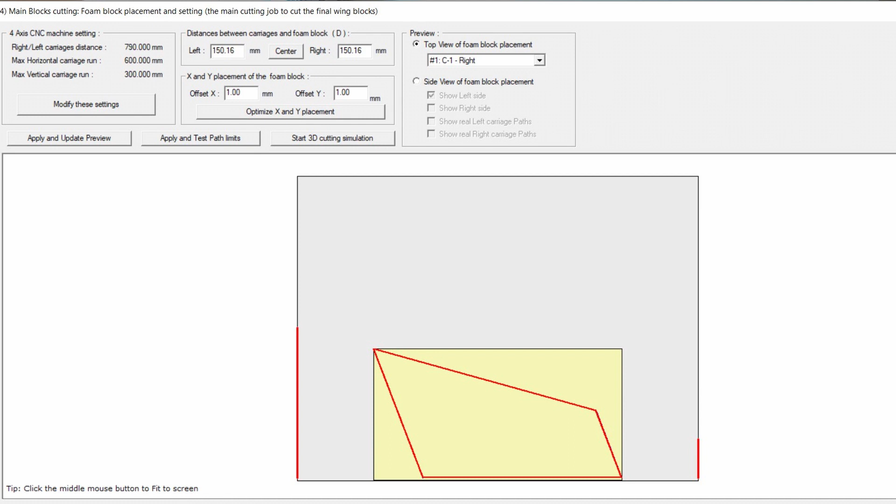And the reason for doing that is two reasons. One, it saves a lot on foam. But if you've got a really swept back wing, you might not have enough travel on your foam cutter to actually get the wing out. By using this option, we can get highly swept back wings, and it also saves a lot of foam. I've managed to get a whole set of wings out of one piece of foam. And then at the final part, I'll put all the parts together and show you what we've got.

So without further ado, let's get started.

So before we start the foam cutting, what we need to do is get the foam cutter set up. I get a few questions on the website and on YouTube about certain aspects of it, so I thought I'd cover some of them with you. It will probably make things a little bit easier, because if you're first starting out in this, it can be a little bit daunting sometimes.

So let's go over a few of the things. In part 2, we created the G code. In the setup, we told the system how much travel we've got on our machine - we gave it distances for the horizontal and the vertical, and the distance of the carriages.

These two are quite easy to work out. All you need to do is, in the control software you're using - at the moment I'm using CNC Foam for this, but it works on any of the other software - just run the system until it comes to the end of its travel as far as it can go, and then note down the figures. So within this here, I've got about 600 on the horizontal and about 300 on the vertical.

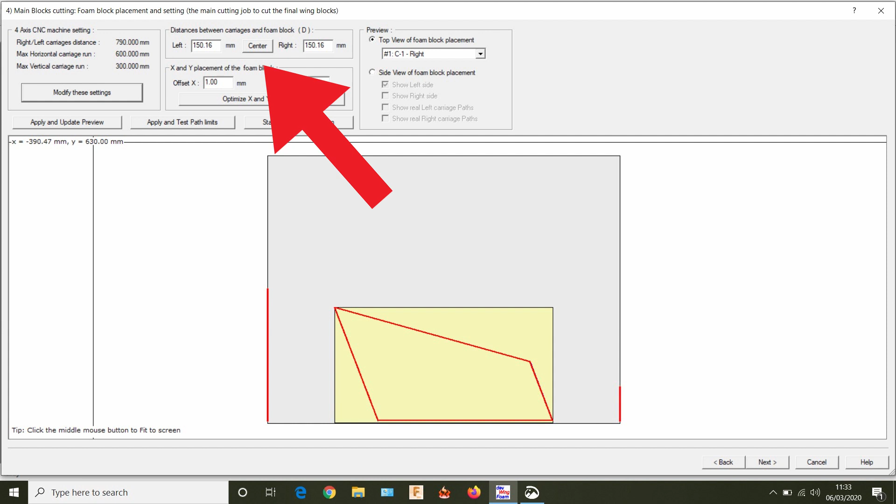What I do then is find the midpoint, because in DevWing Foam all the placement of the foam is done via the centre. You can do it one way or the other, but I tend to like to work to the centre. I put the foam on and then measure from this edge, which is a little bit tricky. I use a square and a tape measure and mark on the foam the exact centre point of the foam.

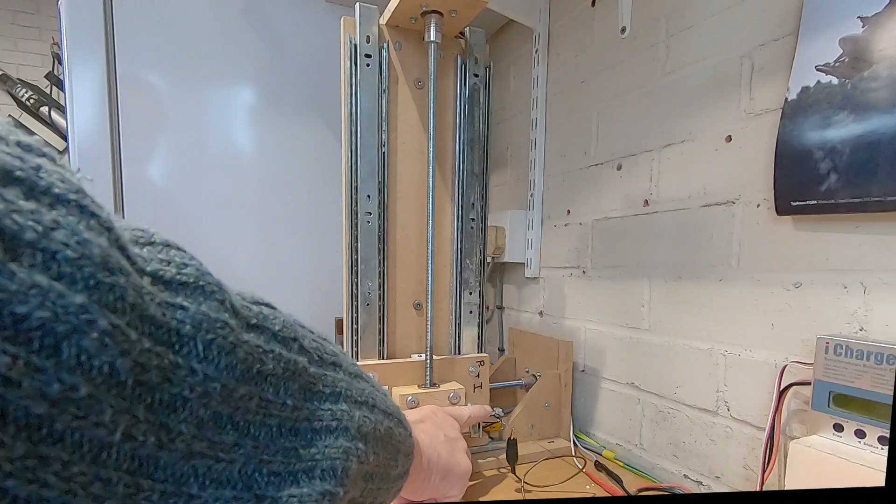The other thing I get questions on quite a lot is tension in the spring. So what I've done is I've actually taken the spring off of here. When I had it out in the shed, I had a lot more distance, so I could actually put the spring down here, but because I'm a little bit restricted in width in here, what I've actually done is moved the spring up to there, and it's attached to the wire.

There's a little joining piece there, and this is very strong fishing wire, I think about 60 pound or so. So what happens now, as I pull on the wire, it just tensions the spring. It means if I had the spring down here, I would be losing quite a lot of width there, and it would restrict the length of the spring.

Sometimes when you're doing these tapered wings, you do get a lot of movement on it, so that seems to work quite well there. I've anchored the fishing line to the bolts here that are holding this piece to the frame, and that seems to work quite well.

Another thing that comes up quite a lot is how to power the wire. There's a couple of ways you can do it. On the ramps board that we're using here, so this works on CNC foam and also the one that's on the website, 4-axis Grbl port.

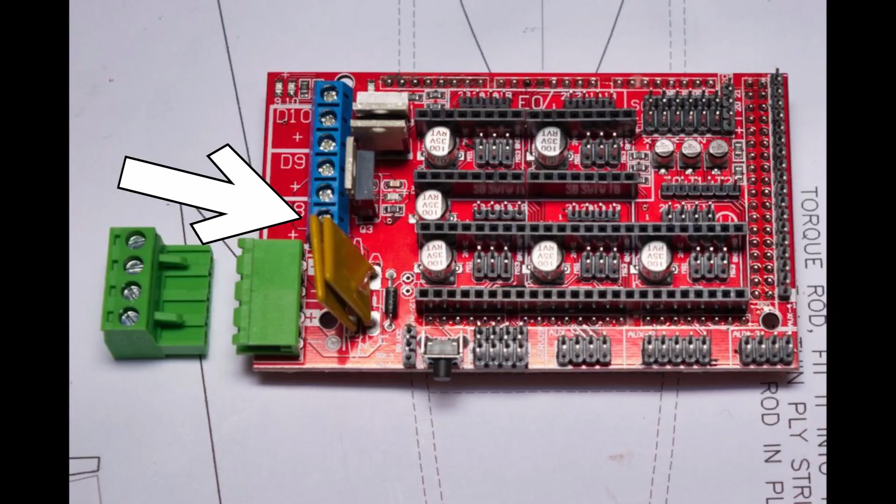You use what would normally power the heated bed, and it uses a PWM signal, pulse width modulation I think. I have used it, and it does work, but what I've found is it's not very consistent. On smaller pieces, it seems to be fine.

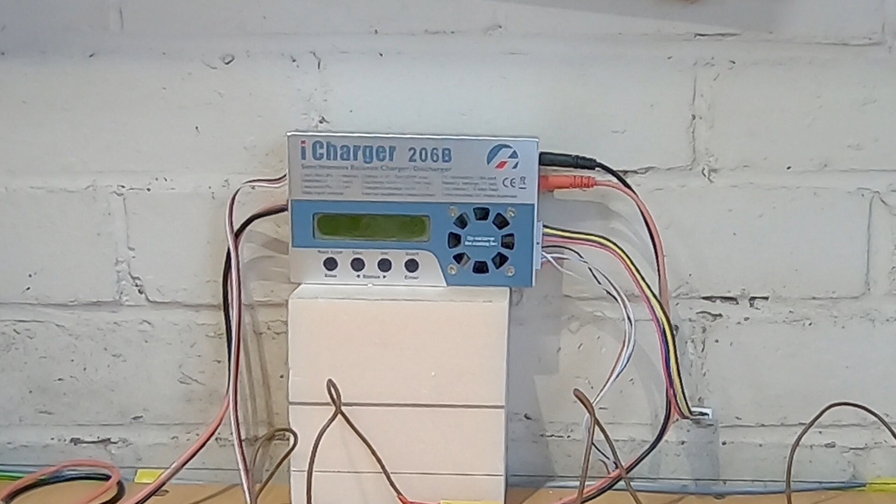So what I've used, and I've used since the beginning, is my iCharger. Now you don't necessarily have to use an iCharger, most LiPo battery chargers will work. What you can do is set them on a NiCad setting and roughly start around about 2 amps, see how that works.

Now on the iCharger, it has got a special foam cut option, so I'll just switch it on. I think really all it is, is probably very similar to the NiCad option. So I've got that set for 2.3 amps.

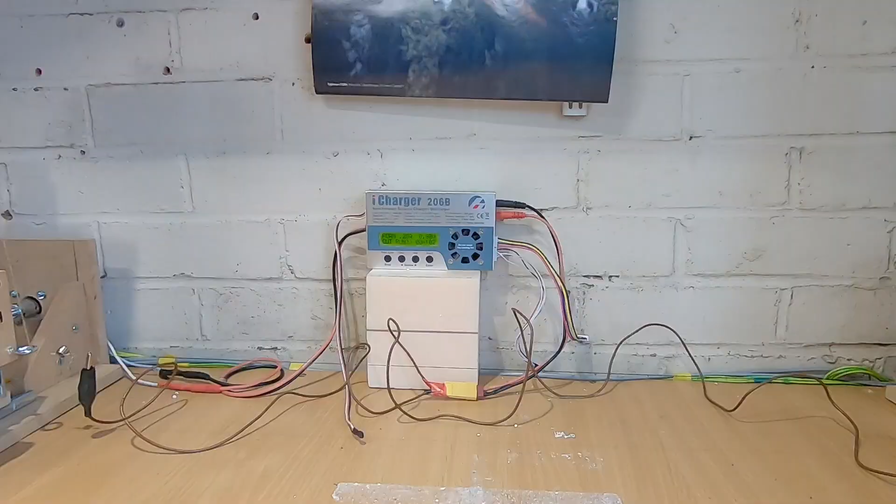The voltage doesn't seem to matter too much, because what happens is as you connect the wire up, if I start the charger going - it doesn't actually start the charger, I've still got to run it manually - you can see the amperage is gradually coming up, and the voltage is altering all the time. What I do then is just let it come up to amperage.

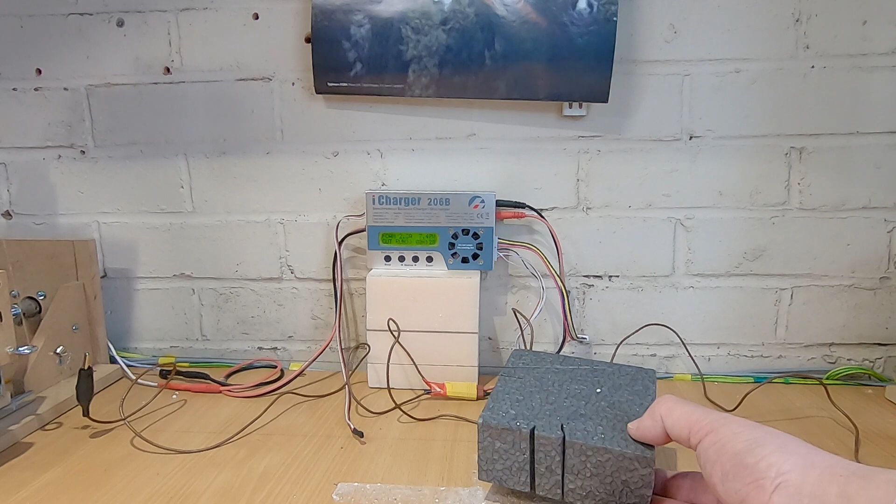So we're running about 2.3 amps on this, and then normally what I do is just run a quick test to see, and you can see that's going through quite easily there.

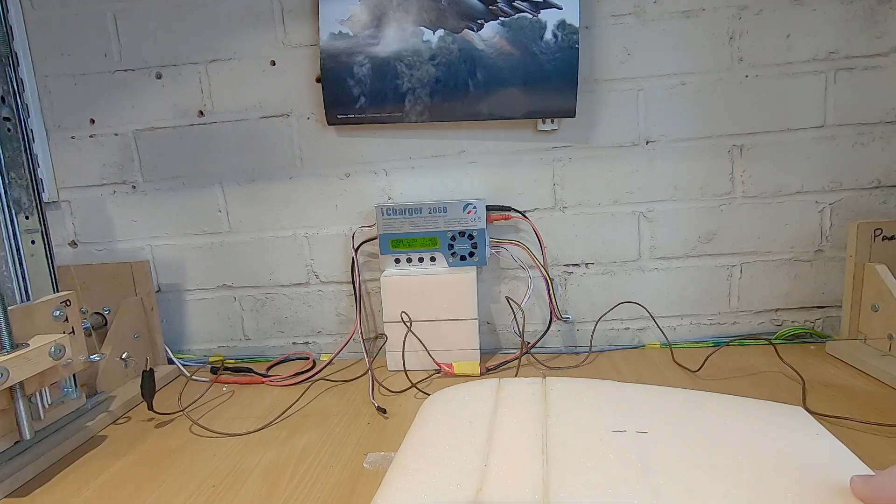So it does vary from the type of foam. On this XPS pink foam, which is a bit like blue foam, I think I use 2.7 amps. So I keep a record of what foam I use and the amperage, and also the length makes a difference.

So if you bring this closer in and you're running 2.3 amps, it's obviously going to get hotter. You don't want the wire glowing red, because it'll be much too hot and you'll probably melt away most of your foam. But it just needs to be hot enough to cut through the foam easily.

And when you watch the cut going, if you see the wire dragging, it means that the wire's not hot enough, or you've got the speed too fast. I tend to leave the speed alone and just adjust the current.

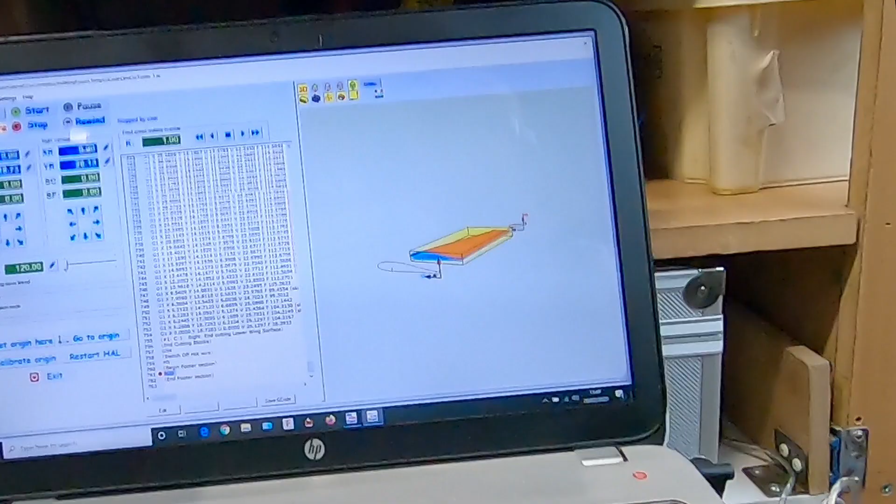And then what I can do within DevCNC Foam, I'll just bring the camera down here so you can see. I've got the laptop down here because I've got no room for it up there.

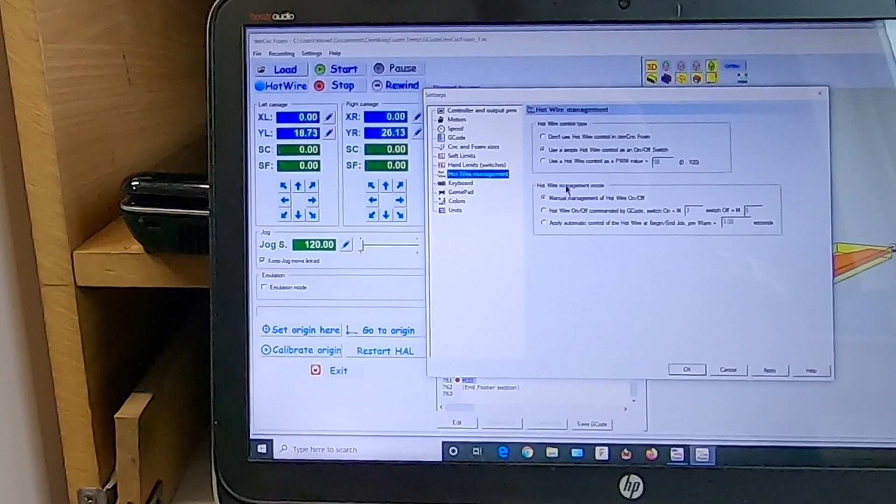So all I'll do there, you can see it's got the hot wire option there. Turn it off. And in settings, we've got hot wire management, and then we've got different options there. So we can use it as a PWM signal. And it does work, but I prefer to use with the charger.

So that's it basically in setting up the foam cutter. So what we'll do now is we'll go on to actually cutting some wing cores.

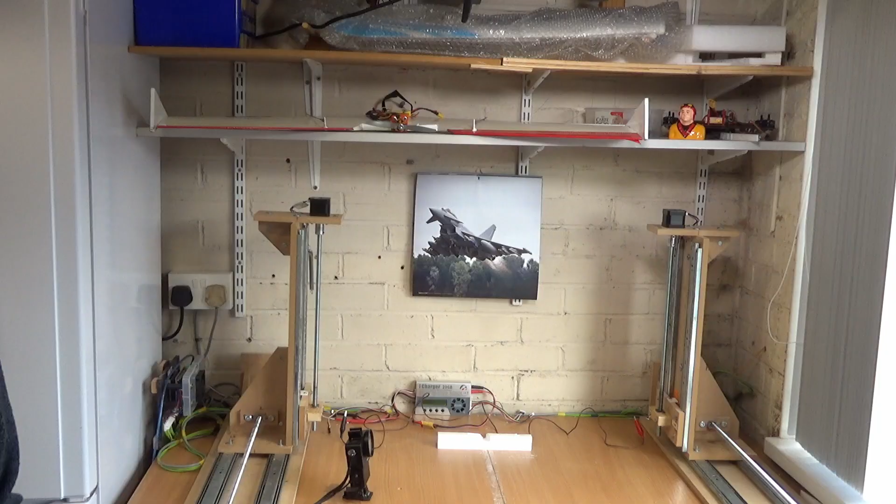So I've already cut the centre section, and I've used some XPS foam for this. This is fairly easy to do, so I didn't want to waste too much time showing how to cut this. But you can see it's got the lightning holes in, and then it's got the spars underneath there, and the spars are going in some 4mm spars, and they fit just about right in there.

So what will happen then is we'll get them glued in, and then put some thin balsa over there, and then or even a little bit of foam, and that will fill that in. And so all I've done there, where it's gone in for the lightning holes, is I've put some balsa strip in there.

So probably what I'm going to do is later on, when the wing's built, is cut the little access holes out here. You can see another line there because I didn't have quite enough foam to do this, so I've had to glue two pieces together. But we should be okay with that.

So we'll go on to do the transition sections next. I've already got a piece cut ready to do that. So this is the piece we're going to use. And I'm actually going to cut both of them at once because it's a smallish section. And I've done a bit of testing.

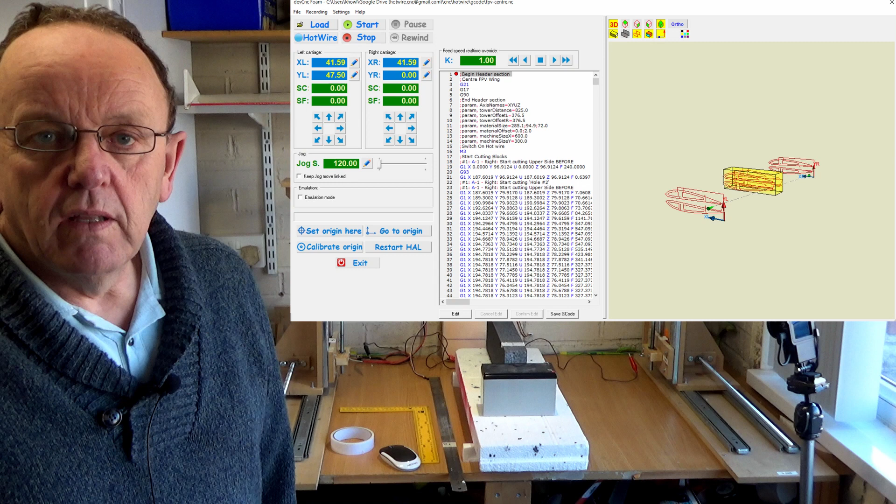So I'm going to be using DevCNC Foam for this. I decided to purchase a license for it because it supports G93, which is what's recommended for DevWing Foam, and it also supports limit switches. I'm going to do a full tutorial on DevCNC Foam, but I won't go into it too much now because it'll make the video too long.

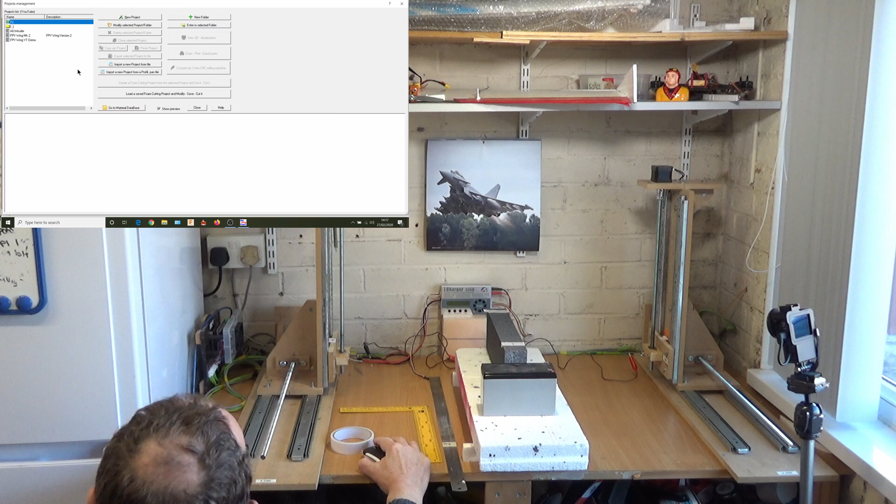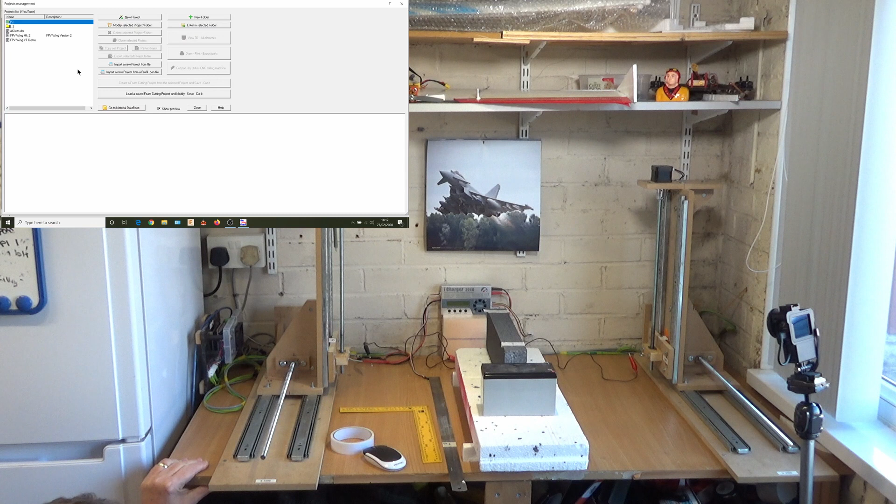Right, DevWing Foam's going. And we'll switch on the controller. So the actual motors are locked now. I've got the computer, you probably can't see it, but the computer's down below because I haven't got room on the table. So as you can see there, we're going to be doing two. So you should be able to see a screenshot of this.

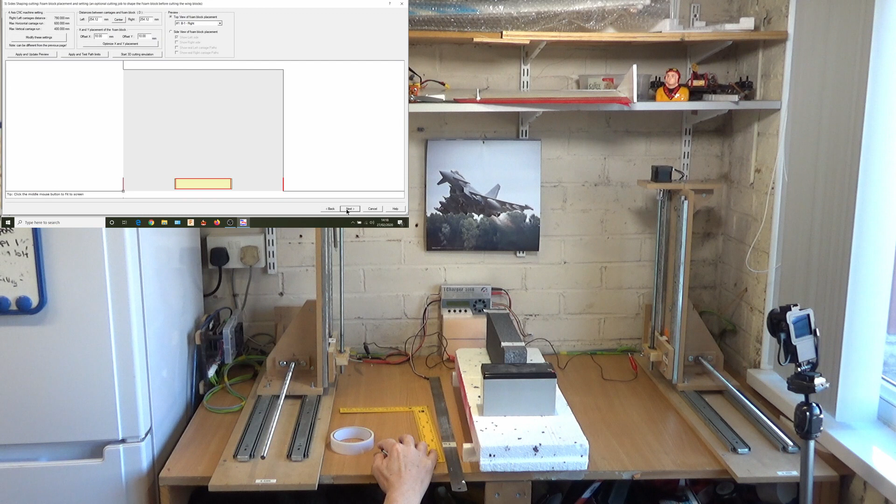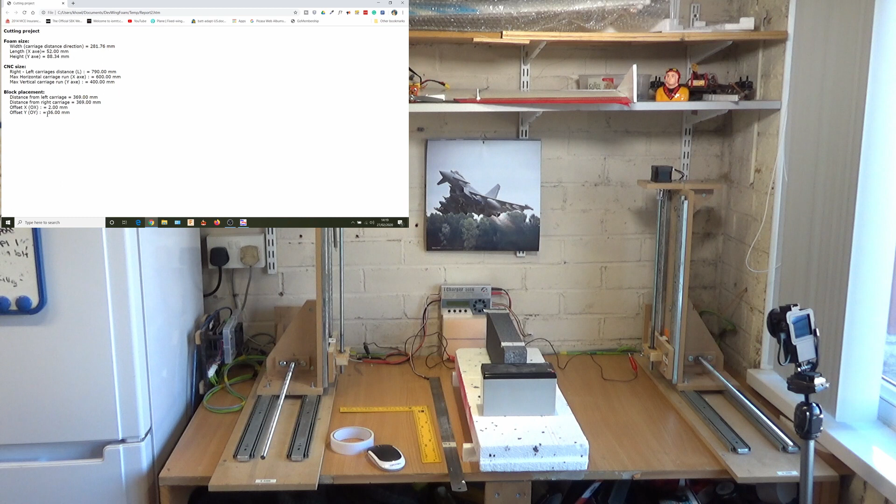I've been through and checked all the curve values and settings, and it's given us our foam size there. This bit of foam is actually a little bit bigger, and that's if we want to pre-cut the block, which I've cut that manually. If we just have a look at the placement, it gives us our foam size, and then it gives us the offset. So what I've had to do is lift the foam support block up a few millimeters, so it's saying 36 on here. That's because the transition piece has got different profiles, so you'll see that the vertical carriages will go up different heights.

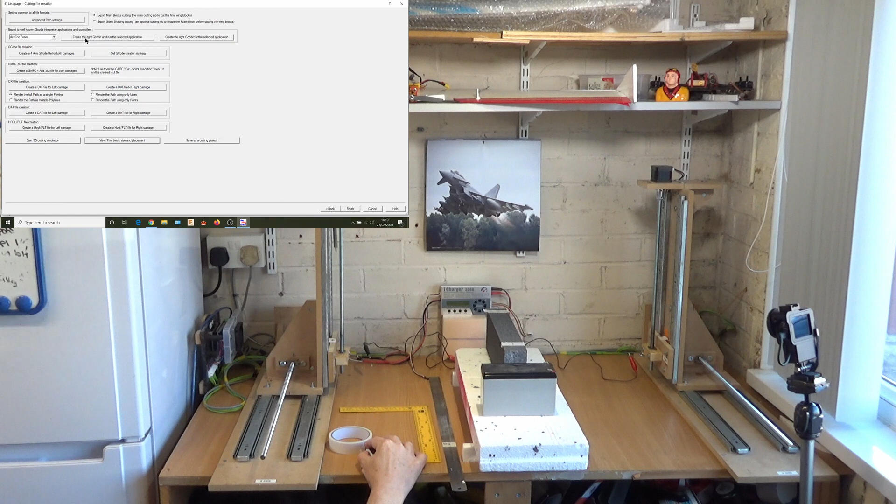So what we'll do now, we've got Dev CNC Foam selected, and it says create the right G code and run the selected application. That should start Dev CNC Foam up for us. There we go, I'll just take the side profiles off for a minute. I've got the hot wire actually getting its power from the ramps board, so it's just an on and off - it just supplies power to the wire.

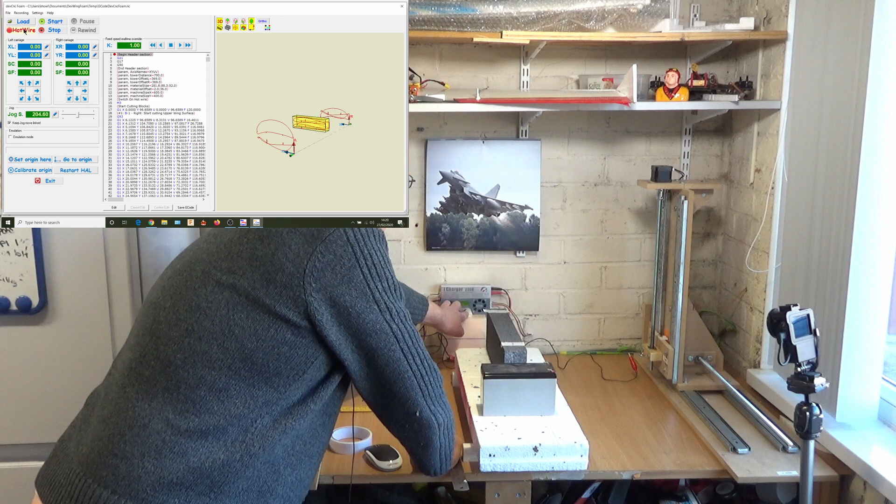I don't know whether you can see it, but the actual foam cut options come on now. So what I'll do is set that to on by pressing start, and what I do then is wait until it comes up to 2.7 amps, which I've got it set to. Have a slurp of tea while we're doing that. So there we are, 2.6, 2.7. Just double check that it's hot. Yeah, straight through.

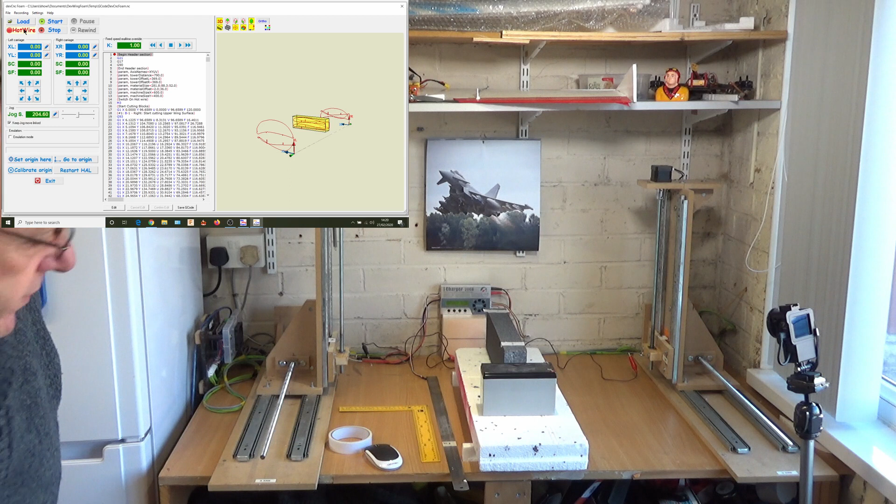And then what we do, the G code's in there, so it's just a matter of selecting start now. Hopefully, if I've got everything right, it should work. The only thing to watch out for is make sure your wires don't touch the hot wire that are feeding the hot wire.

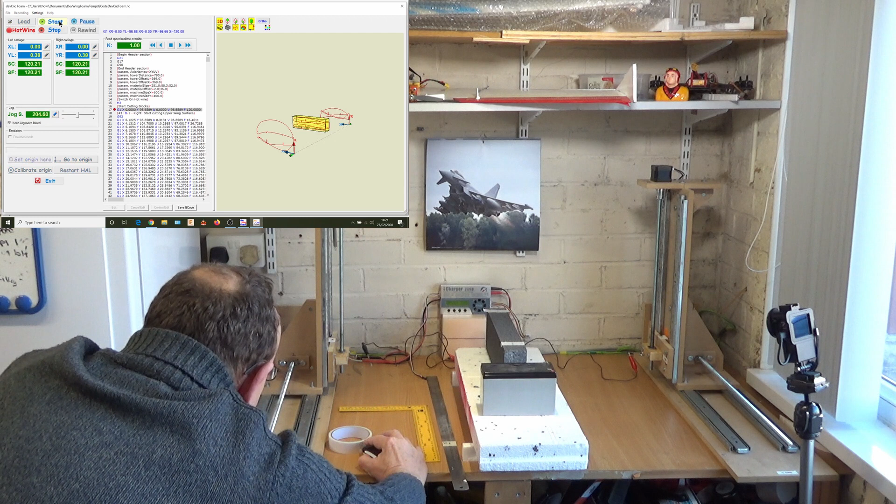So as it's doing this, it's going to be coming up and doing the top one first. I'll speed some of this section up because it's not that exciting to watch. Just have a look, see what we've got here.

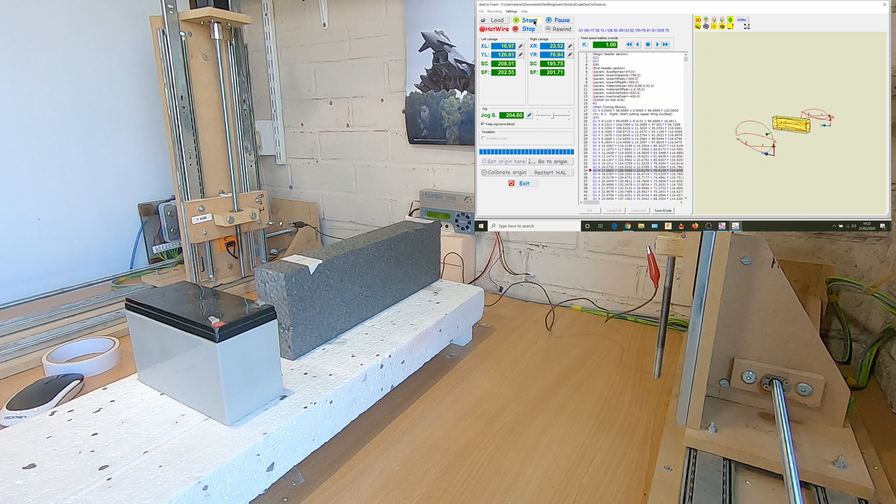So this is the transition section that we're cutting. I actually modified the design a little bit to use the actual thickness of the foam to make it a little bit easier. This foam is 50 millimeters thick, and I think originally I got them set to 40 millimeters, so I've just expanded them a little bit. You can see now that the axis over nearest the window is going up, and then this one's coming down.

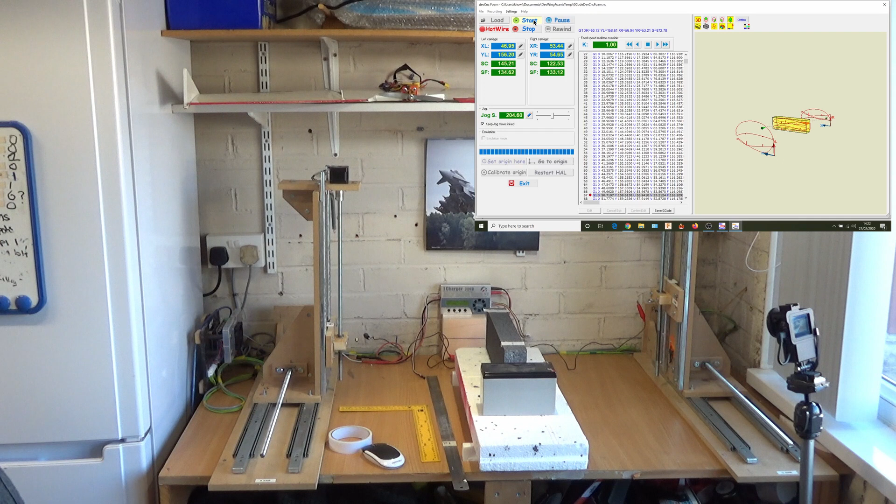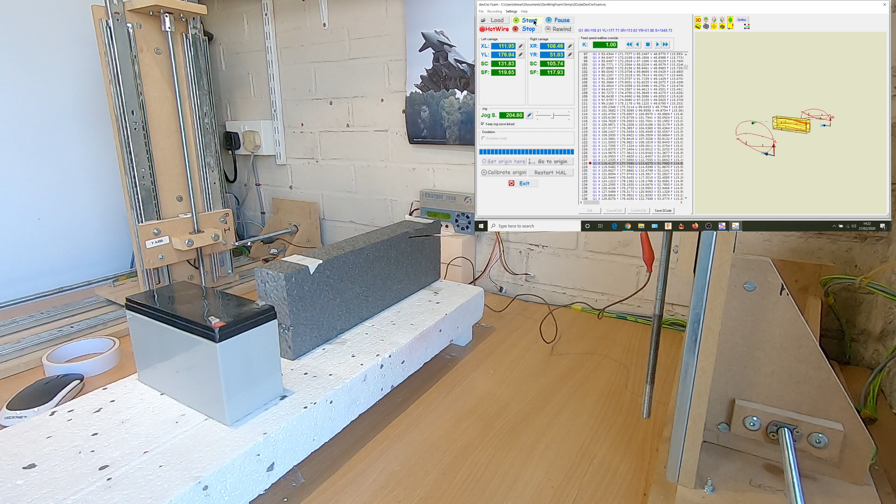So it looks to be going okay. One of the things to check for is to make sure the wire isn't dragging, so I usually just go and stand and look above it to make sure it looks straight. Because if it's dragging, it means you've either got the speed too fast or not enough current. So it looks to be going through okay. A little bit further it'll be doing the spar hole. It's usually at the maximum thickness, which it's coming up to now.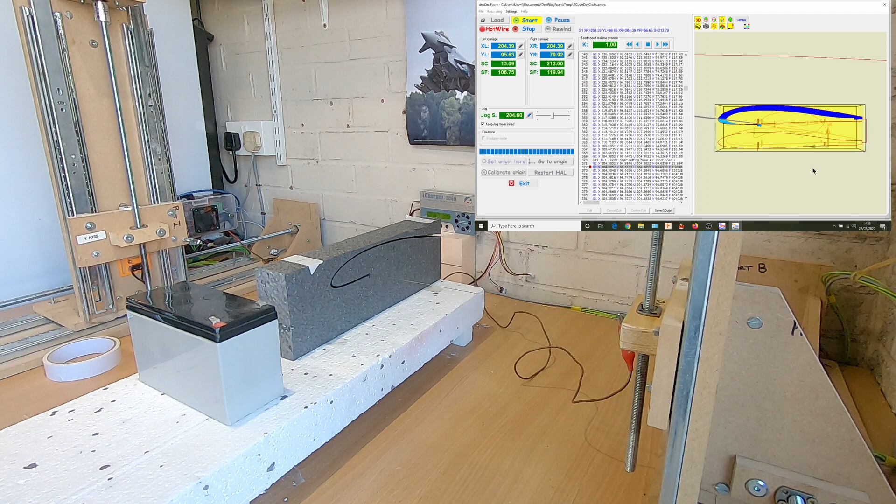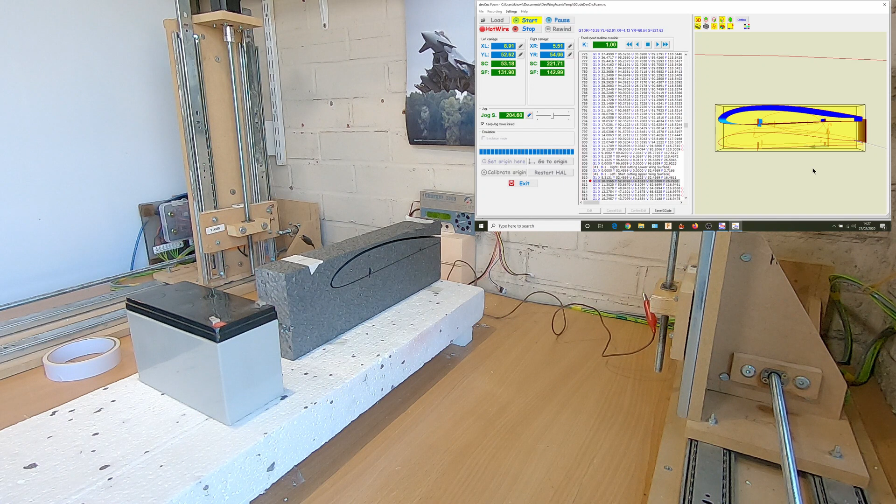So it goes down first and then goes up to make a nice clean cut. So first one done, now it should go down to do the one underneath. You always want to do the top one first, because if you did the bottom one, what tends to happen, it tends to drop a little bit of foam, and you'd probably lose stability as well. So now we're doing the opposite, doing the left and right here.

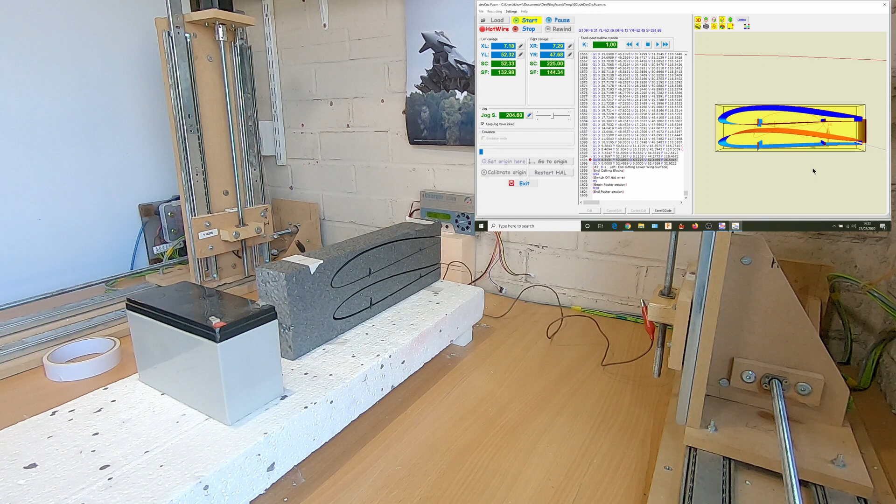That's it, right, so I'll switch the wire off. The wire's gone off. Let's see what we've got. There's one. There's the other. See how it matches up with this.

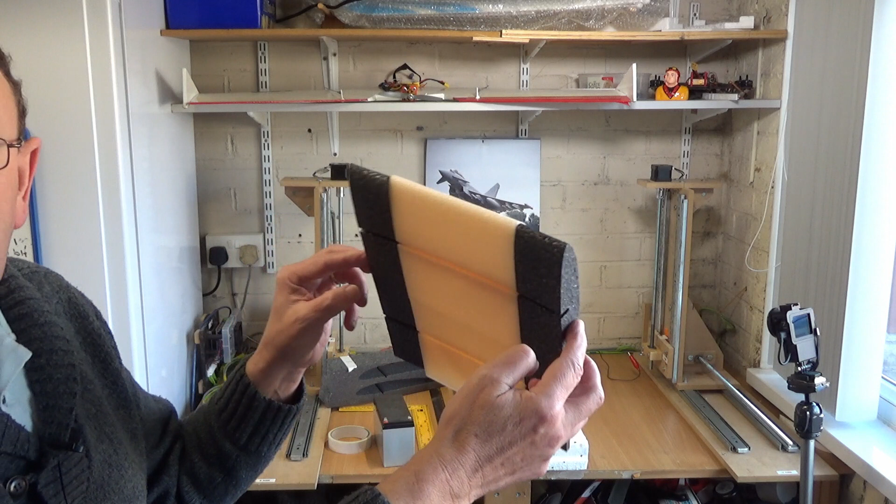It's not bad at all. So that way you can see, there's our spar holes lining up. This one's a little bit off, these bits of bolts are sticking out, that's why it's not lining up exactly. Yeah, so that's not bad at all. At the back end here, I'm going to be cutting some of this away as well for the motor mount to go in, so yeah, that looks okay.

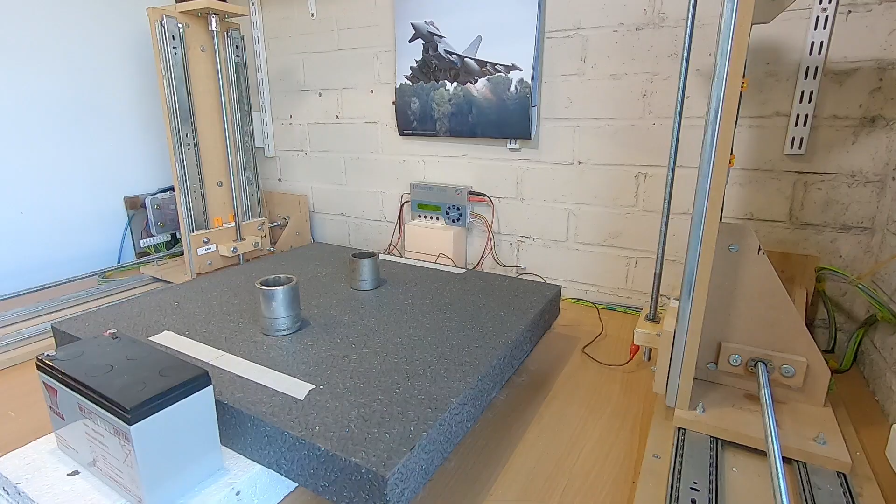Just got the two outer sections to do now. Yes, I'm quite pleased with that. Right, so what we'll do now is we'll go on to do the outer sections. I've set it up ready to do the outer section, and because it's a bit bigger piece, I've put a couple of little sockets on there just to stop it moving. It's got some double-sided tape underneath as well. So we'll set it going.

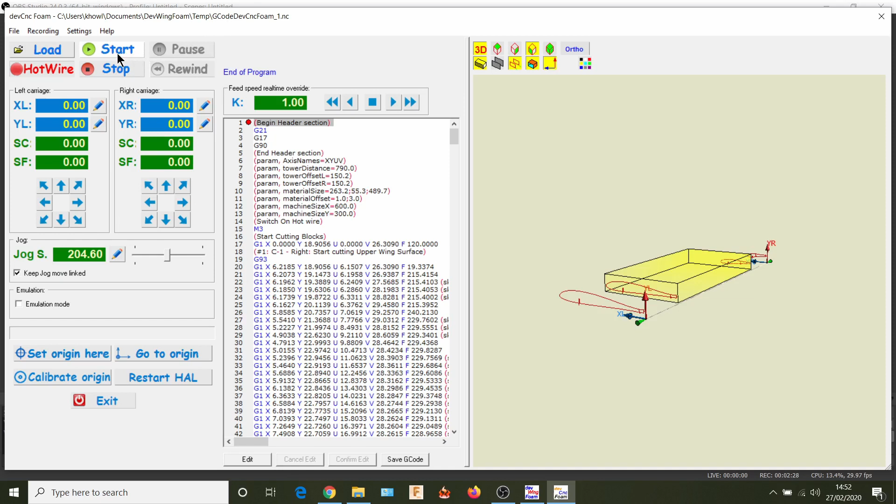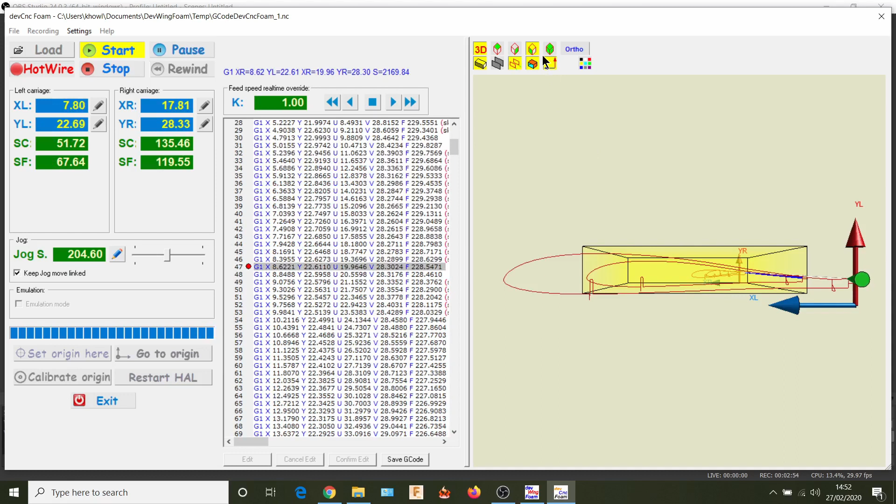Just wait till it comes up to 2.7 amps. Right. Hopefully it should work. So with this one, we've got an aileron in with it. Let's just turn it on its side again - not that one, that one. Maybe better to look at it that way this time. Just have a look at the wire, see if the wire looks straight. Yeah.

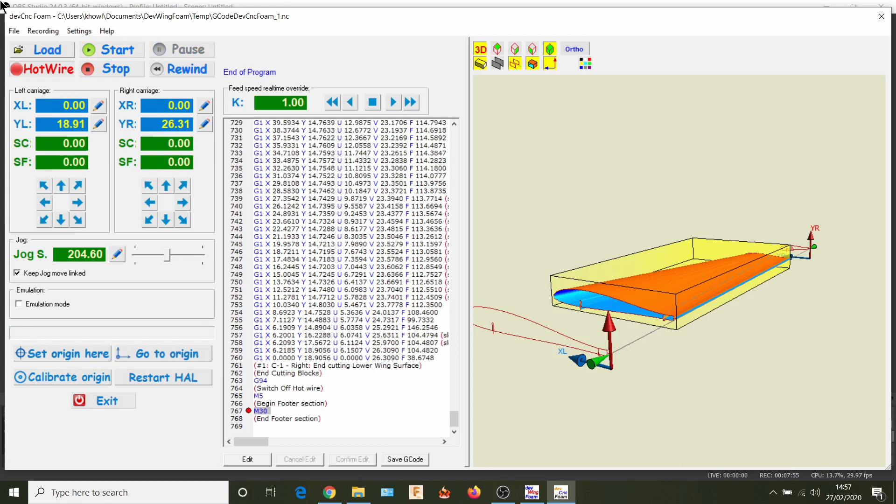There we are, done. Quicker than I thought. Right, let's switch the wire off.

This is the first time I've really used this foam. As you can probably see there, it just came out the top a little bit, just there, but I think we can get around that with some filling. It's not like a major section.

Let's have a look. Yeah, I think if anything, the temperature, the wire's a little bit hot. So, yeah, you can see it's melted a little bit there. As it's got down towards the end, it's melted more because it's not moving as far.

Right guys, I wasn't very happy with the cores that came out, and I had an error on the setup. I'd got the set too high in the foam, so I went in and altered that, and I've already run one cut, and it's come out all right. But what I've also done is lowered the current down. So instead of having 2.7 amps, I've gone to 2.3 amps. And if I remember when I was cutting foam before, that's what I used to use on my iCharger.

And as I said before, you can use a normal LiPo charger if you've got a NiCad setting on there, and set it to roughly about 2 amps, and then sort of work up from there. So I've cut one out already and it looks a lot better, but what we'll do is we'll take this one out now and see what she looks like.

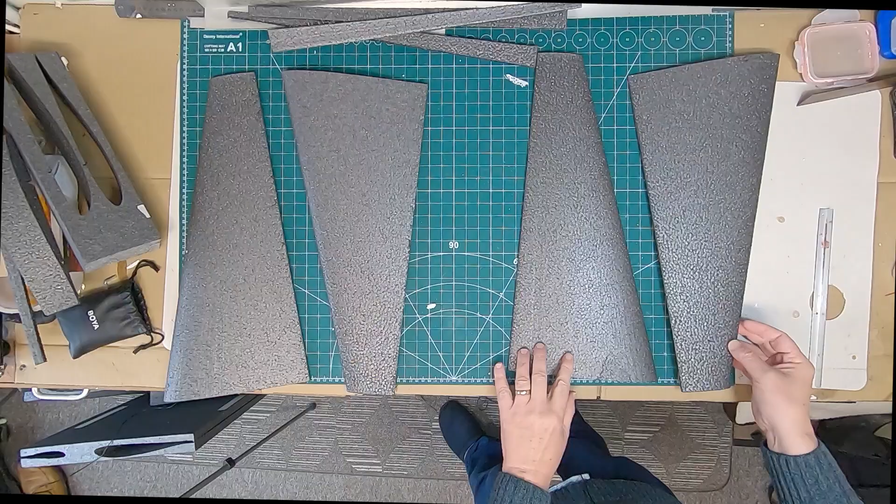Right, so I've laid these cores out as they've been cut. So this was the first one, second one, and then the third and the fourth. Well, that might have been third and fourth cut. But this one we started off at 2.7 amps on the iCharger. And I think, as you can see down there, when we get towards the tip, it's melted quite a lot away there. And even if we look on the edge, you can see it's even melted some in there and curved it away. So it'd still be usable, with a little bit of filling, it would probably be okay.

So that was 2.7 amps. Then I turned this one down to 2.5, I think, and then altered the kerf values a bit. And it's still got a slight indentation there, as you can see, but it does look better if we compare the two now. You can see the differences in the end of the spar holes. So that one's getting better.

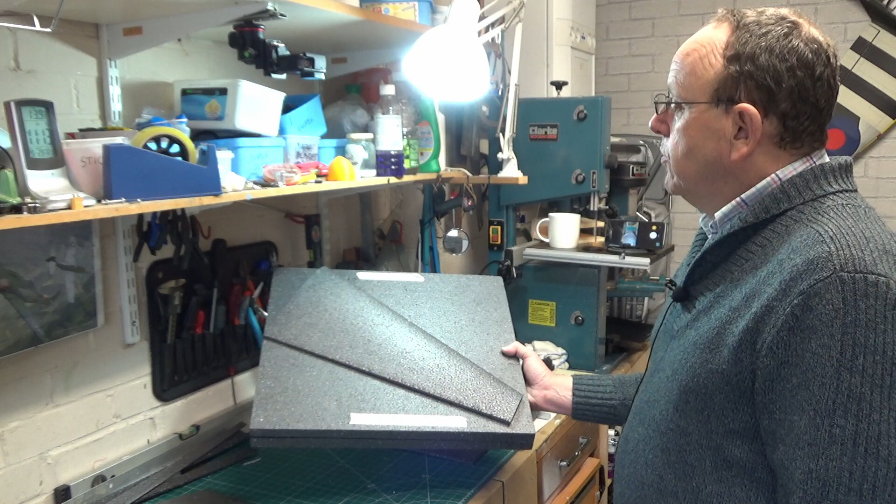And luckily with this foam, with DevWing Foam, because you can rotate the wing and align it with the trailing edge, you save a lot of foam. So you can see on this section here, I've managed to get two wings out there, just by turning it and rotating it. So if we hadn't done that, if we'd cut it like that, we'd have probably only got one wing core out of this piece of foam. So it is a good option.

Now the only thing we've got to do now is cut the angles on the root and tip, but we'll go into that in a little bit and I'll show you how I do that. So if we now look at the tip on both of them, you can see there's a big difference. There's still a little bit there, but as I said, it's always a little bit of a compromise to get it spot on, but that's good enough there.

And the actual carbon rod, so this is 4mm carbon rod, fits in there quite well, a little bit snug at the top and fits quite well down there, so I think that's going to be absolutely fine.

So once I did that, I then did the second one, and that's nice and snug at the top, so that's just about the right settings for this foam.

As I said previously, with foam cutting there's a lot of testing going on, and you can probably see all the scrap bits I've used earlier. So what you need to do is run quite a few tests, and you will ruin some foam. I've ruined some cut jobs that I thought were going to be okay, with something gone wrong.

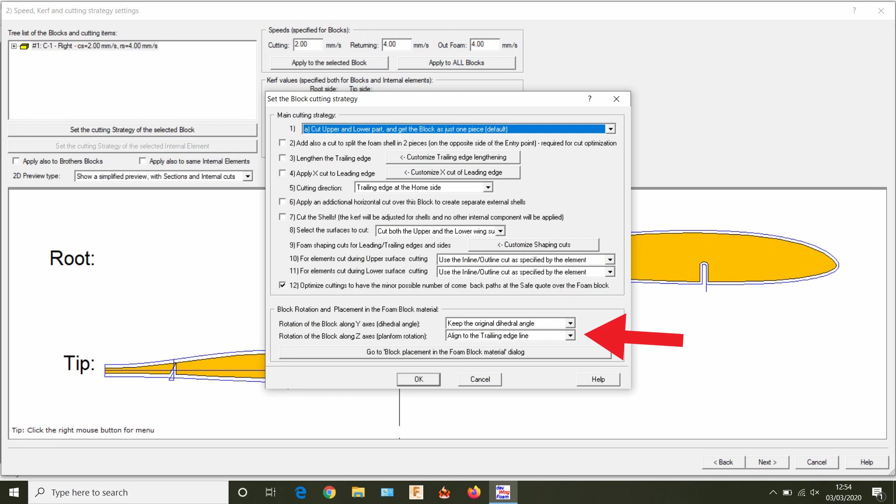We've got the wing cores cut now, but because we've used the option to rotate the wing to align with the trailing edge to save on foam, what we need to do now is cut the root and tip. Now, I've already cut one, so this is what we need to get to.

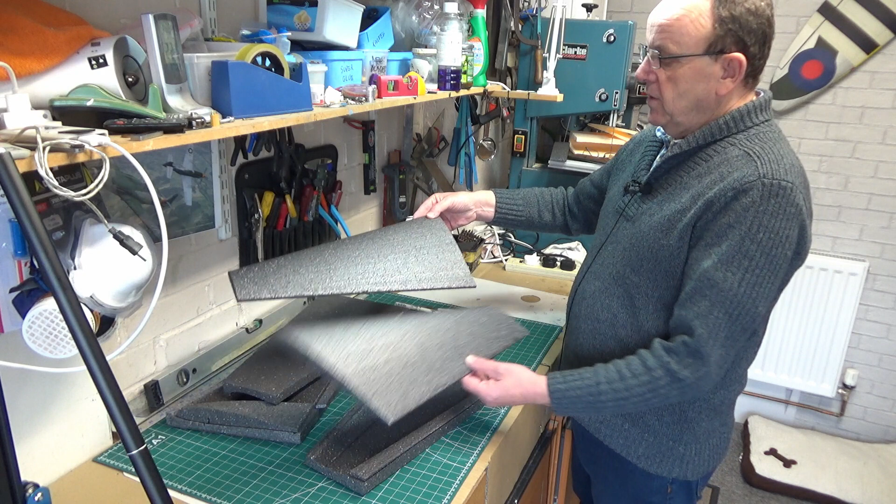And this is the opposite wing. So you can see there's a big difference there, because this hasn't got the root and tip cut to the correct angles yet.

So the way I do it is I mark the angles and then take it over to the foam cutter and line it up with the foam cutter on these lines that I've created, and we'll go into show you how you create them in a moment, and then set the foam cutter to go straight down. I'll show you that bit as we come to it.

So the first thing we need to do is get these angles correctly marked on the core. Now the way to do it, we'll just move this one out of the way that's already been done.

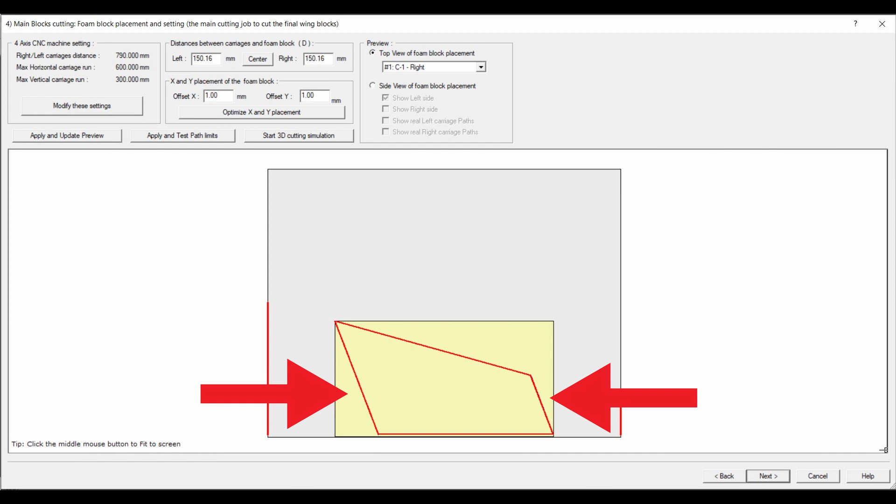So here's the wing core with this part called the shell, that it's come out of. All I've done is I've just made it a bit smaller, cut it, and then split it in half. So we've got the top piece and then the bottom piece as well.

And we've still got the aileron in there as well. So don't throw these away, because they're really handy when we're building. We can keep the core supported in these shells so they don't get damaged, because with it being soft foam at the moment, it can get damaged quite easily.

So the first thing we need to do before we do anything is take the core out. What we need to do is mark these angles, and then we'll take it across to the foam cutter and use the Y just to go down and chop these angles correctly. But first we need to get these angles marked correctly.

And the way I do it, we take the core that we want to mark the angle on, and what I do is I create a full-size template of the wing.

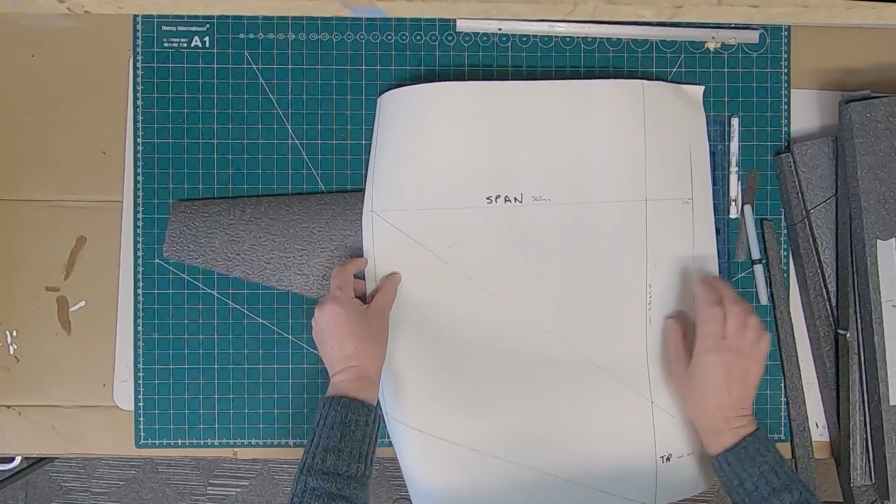So I've used this, it's actually lining paper for putting on walls. I've got a whole roll of it here. My next door neighbour gave this to me, he had some decorating done and had this left over. He said, did you want it? And I thought this would be dead handy for this type of thing.

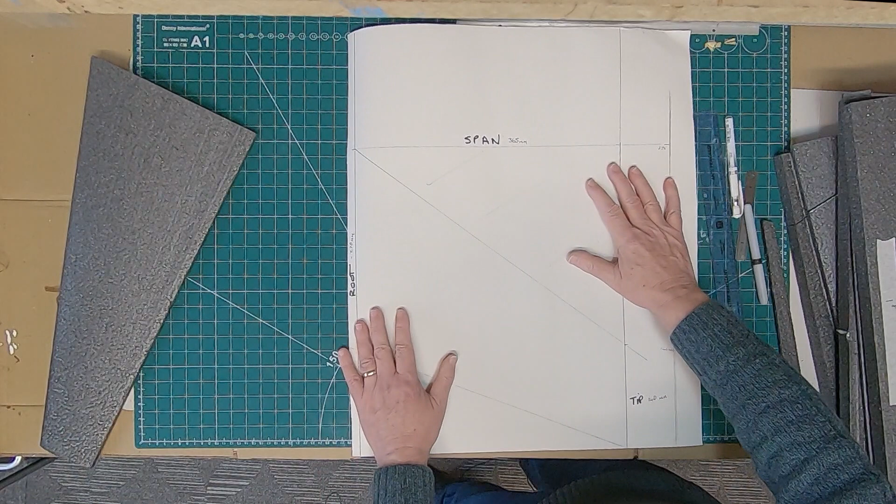So what I've done is I've just taken a piece off and marked the actual dimensions out on here. What I do is I start off by getting the span first, so I mark a line there and then measure across for the wingspan, which is 365, mark that down there. You've got to make sure the paper's big enough to do this. Then start marking the sweep back and the tip, and just join the lines up.

So this is what size our wing should be with the aileron attached as well. And then what I do, I think I've got it on both sides actually. Yeah, so it's exactly the same on this side. Just put that down there to stop it from rolling.

And then all I do is put the wing on, and to make sure I'm right on this edge properly, I use this piece of angle here. I just line that up exactly on the line there, push it into place, and what we can do as well is just put a bit of weight on there to stop that from moving.

Let's pull this over a bit so you can see it better. Hopefully that will line up properly. That's a little bit off there. Bring the wing along and then just look down it until the root, edge of the root there is just in line, and then mark it.

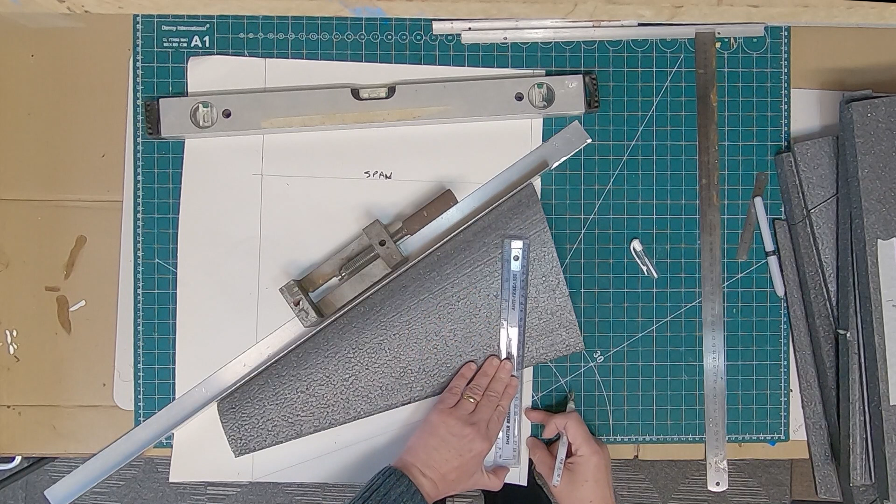So there's a couple of ways to do this. I've got this white marker pen here, which seems to work quite well on here once you get it going. All I do to start with, you don't need to mark it all the way across, we just need enough to line the wire up. So what I tend to do is make sure it's got a good portion there.

Then mark that. So we've got that there. And then transfer that to there so it doesn't move. And then we can move that out of the way, and we do the same up the top. It helps being a flexible rule as well, so we can just line it up there.

And then what we'll do, we'll put it in the foam cutter in the bottom piece, and that keeps it nice and square. And then I've got a little bit of G-code we just run to chop that down. So we do the same on the tip here. Tip's a little bit easier.

Let's just move it up a little bit. Still looking in line there yet, because it's not quite as big. Not the best of pens, this. There we go.

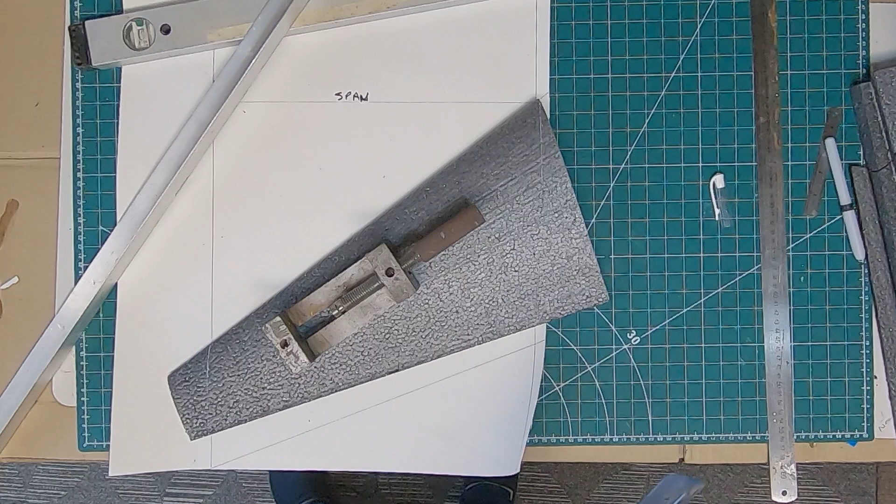Right, so we've got them marks on there now, and we don't necessarily have to mark it on the aileron, because what we'll do now is pin the core into the shell so it doesn't move. So we get the bottom part.

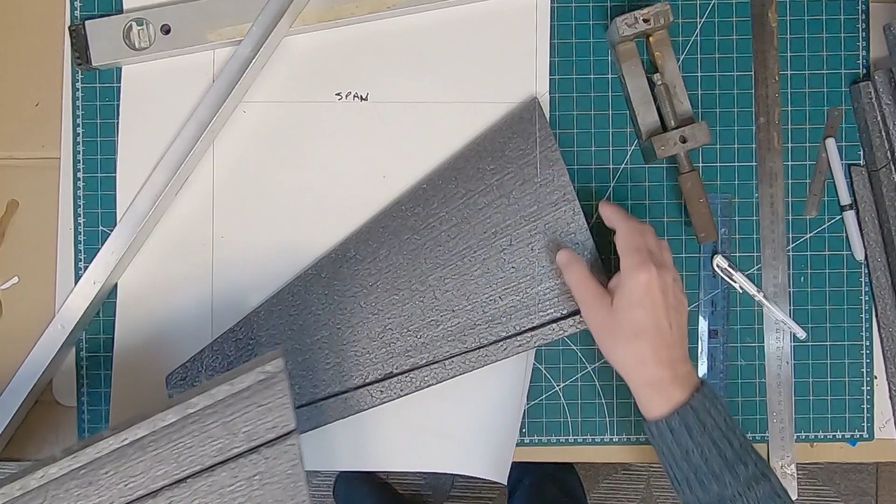Just put it in there, and then I just get a couple of pins. Just make sure we're lined up. The pins are just to stop it moving within the foam, so I just put them through at a bit of an angle. And then we'll do the same on the aileron section.

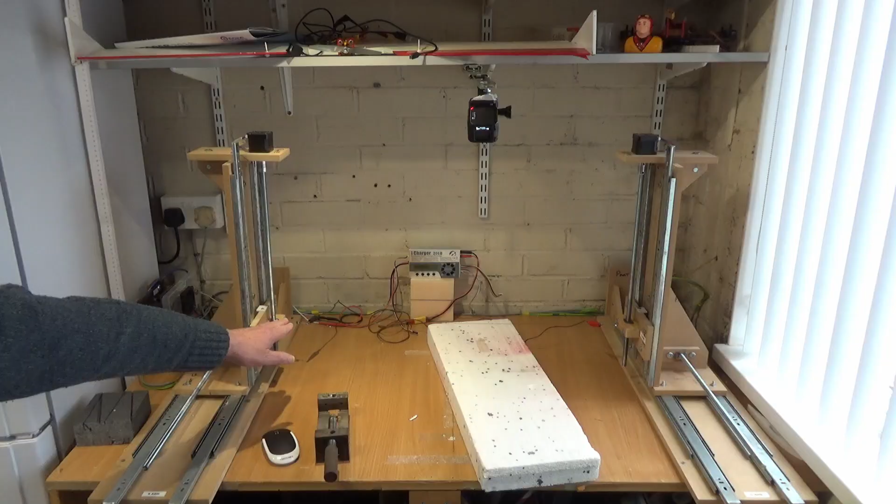And then what we'll do now, we'll take it over to the foam cutter, set the foam cutter up, and then we'll just run the wire straight through there, and that will give us our angle. It's up about 55mm, and then I brought the carriages forward about 120mm. And then what we do then, we bring our

Wing core across in the shell with it pinned in so it doesn't move, and basically all we're going to do is just line that line up across there. Let's just set the wire up.

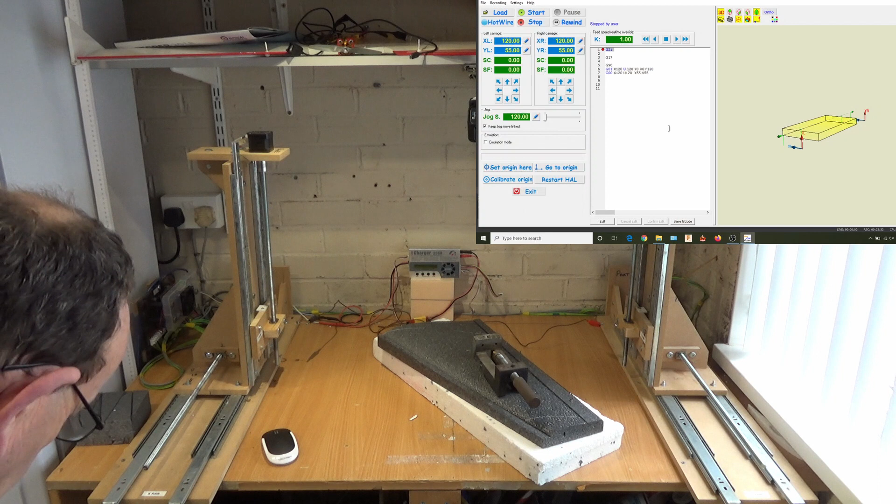Right, so I think what I'm going to do is bring the wire down a little bit because it looks a little bit high there, so I can get a better view of it. So what we'll do is come down to, let's try 45. Oh, did the wrong one then.

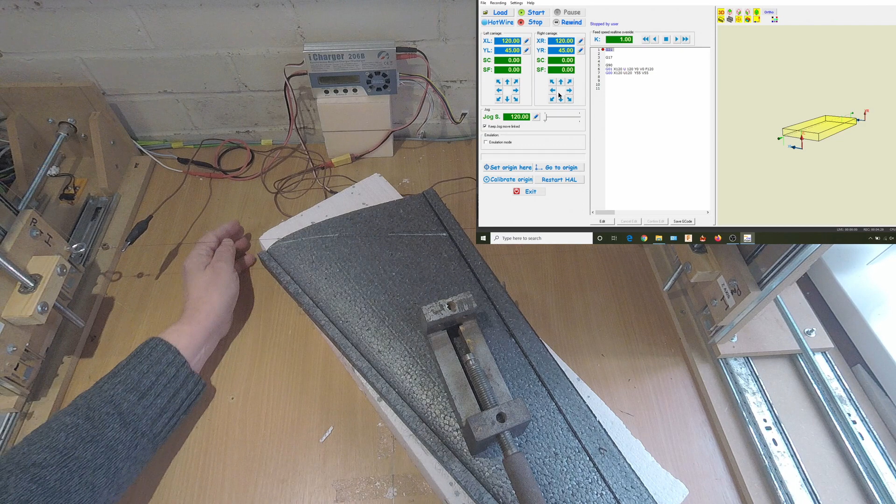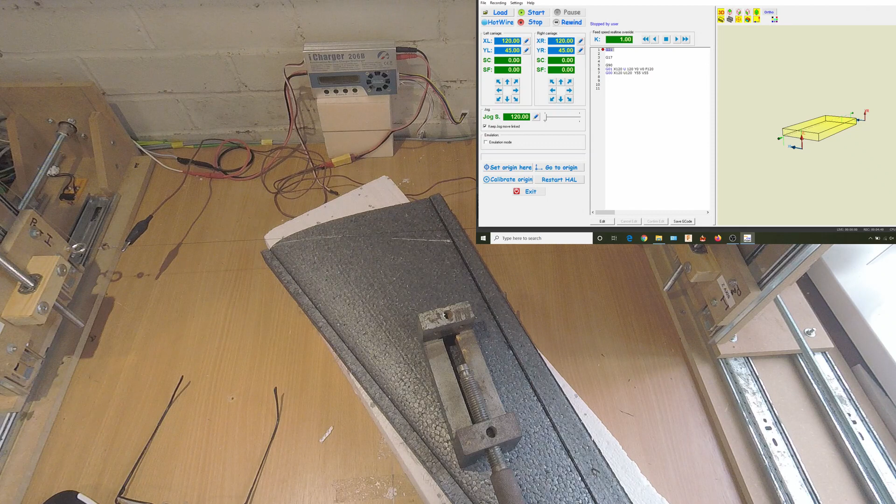How's that looking there? Yeah, it's not too bad. So all I do now is look down over the top of it. That's looking about... take the glasses off, the light's not the best here. Yeah, that's looking pretty good there.

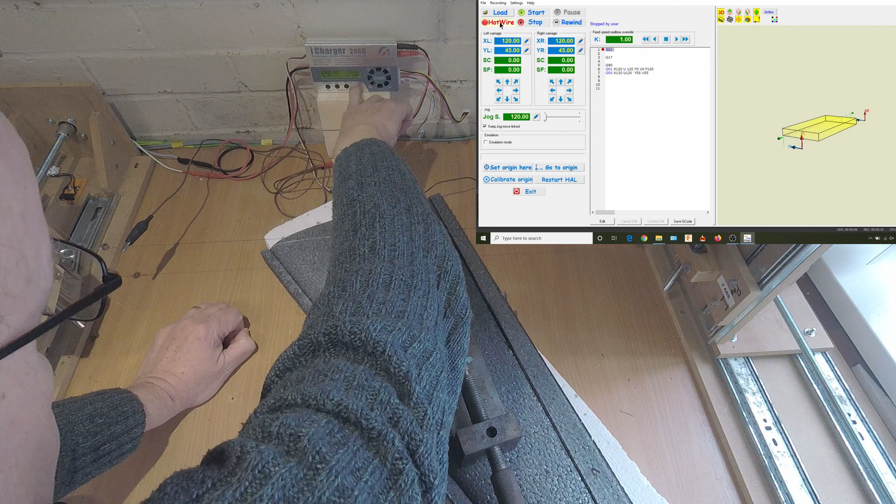And then what we need to do is set the wire going, so I'll connect it. And then we're still on 2.3. So we'll let that come up to temperature. Point 2.3, let's just check it, make sure it is.

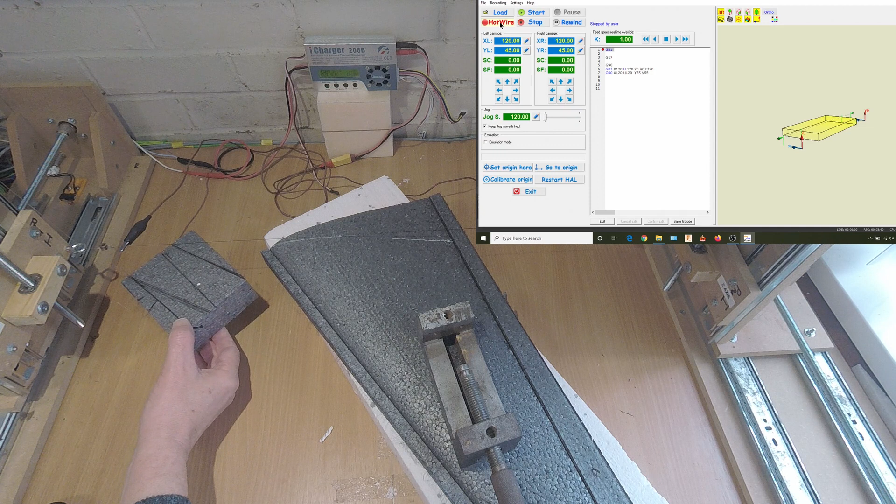Yeah, that's okay. And all I do then is run this little piece of G-code. So the first two lines, G21, G17 and G90, are just setting the foam cutter up in metric, and I think it's XY plane, and then in absolute mode. I could be wrong on that.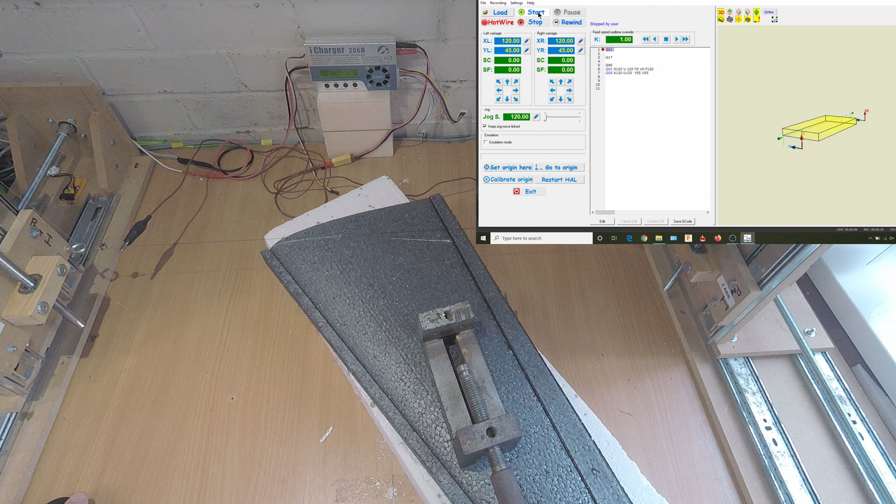And then all we'll do is run the G-code now. So the first line, G01, that's got the feed on, so that's going to feed it down at the correct rate. And then when it's done, G00 back up to X120, U120, Y55, and V55. That's going to bring it back out. So here we go.

And by having it in the shell, it makes sure that the core is actually straight, so you're not going to get any extra dihedral or anhedral added onto the tip. And then once it's done that, it'll come back out.

So let's cut a little bit of aeroplane off there. That looks pretty good. So we'll just turn the wire off.

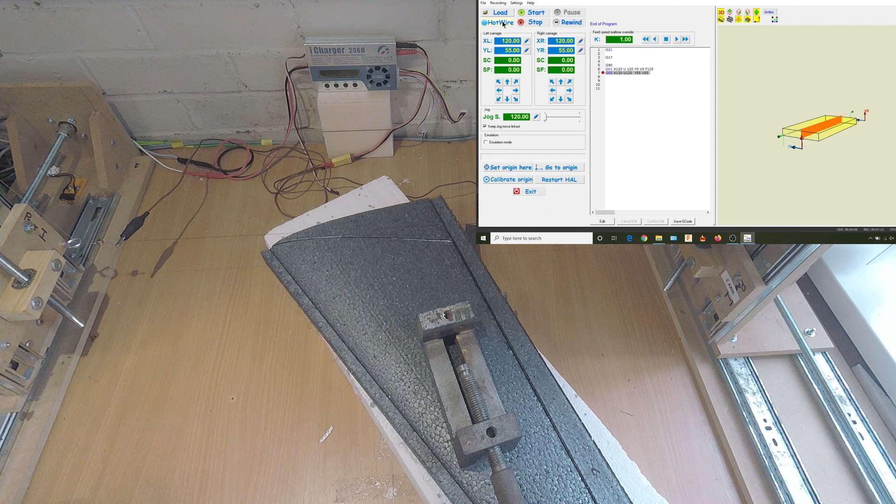And then all we do is turn it round and do exactly the same on the tip. I'll bring the wire down a bit because it's a little bit high there for lining up. So I think we'll come down to about 40 on there.

One of the beauties of DevCNC foam is you can synchronise on the jog here. You can synchronise so it keeps jog moves linked, so I only have to tell it to move on the vertical axis and it does both the left and right. So we'll go to, let's try 35, see where that gets us.

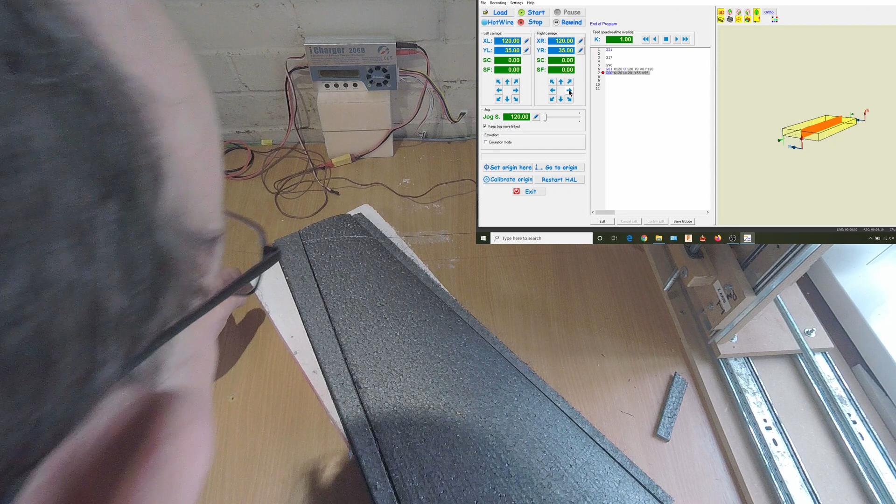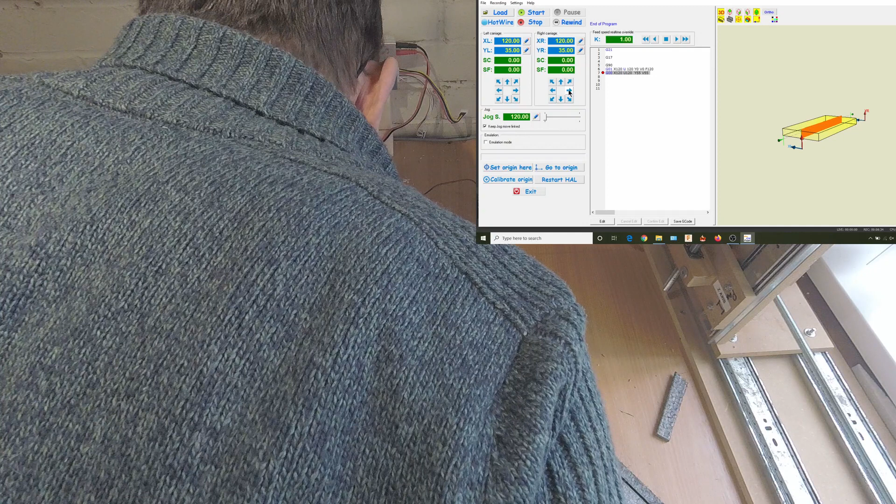Oh yeah, just about spot on there. So let's get our weight on again just to keep it straight, a bit near that end. Yep, that looks right there. Switch the wire back on.

2.3. Wait for that to come up to temperature. There we go. And then all we do is rewind the G-code, so you can see the red dot's back at the top there. And then we're up to temperature, so we'll press start again.

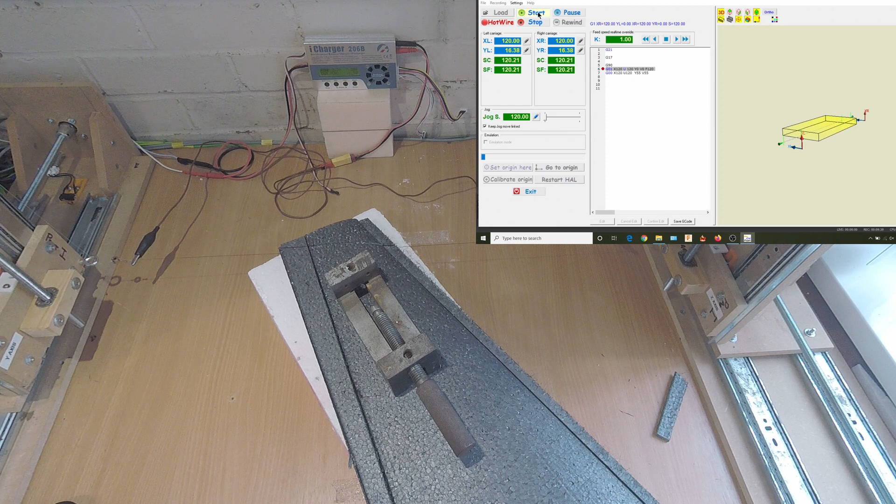There we go, it's just pulled the tip piece off. Let's take that off, mind your fingers. Stop the wire. We can switch DevCNC Foam off now.

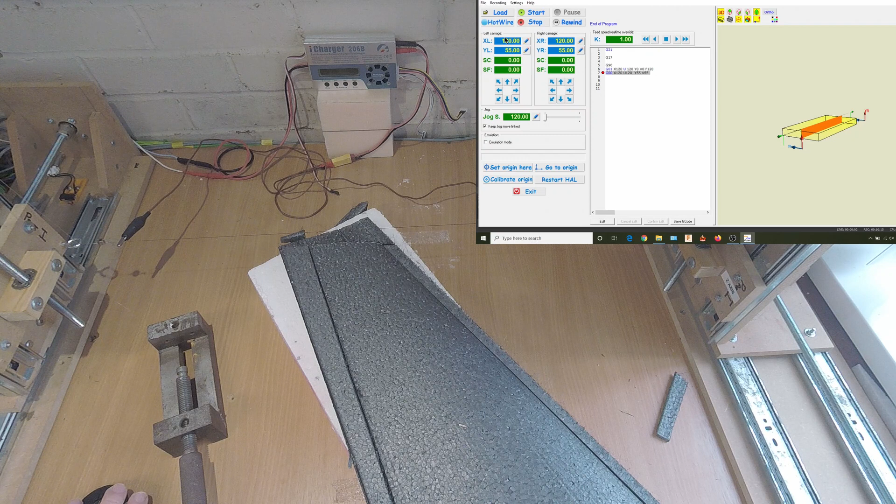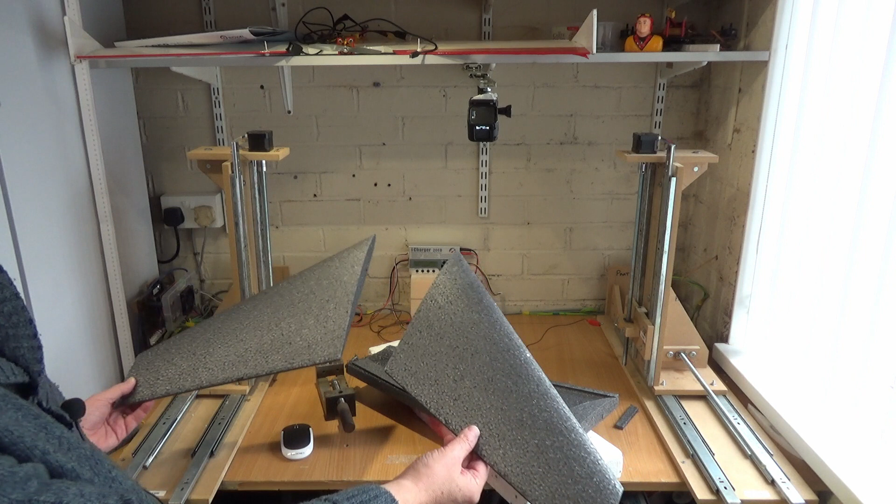Right, so we'll have a look at the, we'll pull our pins out. Let's get the other side. So here we've got our two cores now. Hopefully they should be more or less the same.

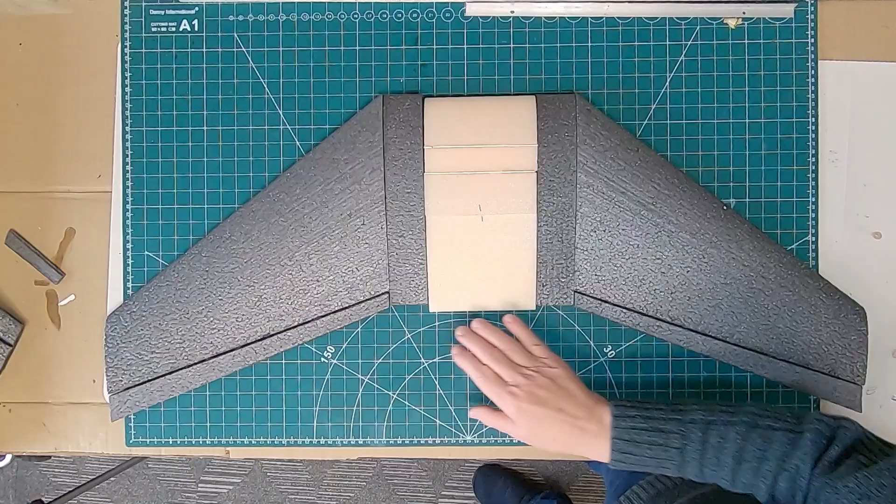Yeah, makes a nice little wing, that. So there we are, guys, that's all the parts cut. So we've got our outer, transition, middle piece, transition, outer, and then we've got the ailerons there as well.

The ailerons look quite thin, and they're only made with this foam. But I'm going to try putting some 3mm carbon rods in there and see what they're like. If not, probably what I'll do is I'll just make some out of balsa, so that'll be all right for that.

And the parts that are going to go in here, I've got two 9-gram metal geared servos. With flying wings, I'd always advise you to use metal gear servos. I've used the cheaper ones you can get from Hobby King, and they're all right, but if you do have a bit of a heavy landing they don't tend to last very well. I think some of them I found have quite a lot of play in the actual nylon gears, so with flying wings now I always use metal gear servos.